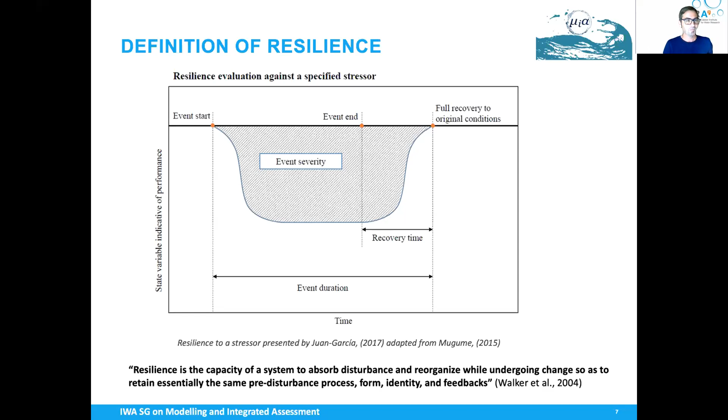So given that context, if we have our urban water systems, we have direct stressors: climate change and human behaviors change the composition and the quantity of wastewater being generated and transported to the water resource recovery facilities. So these changes are direct stressors. So the system needs to adapt, needs to be resilient against these changes to guarantee the performance and to go back to normality if the system goes in a different state.

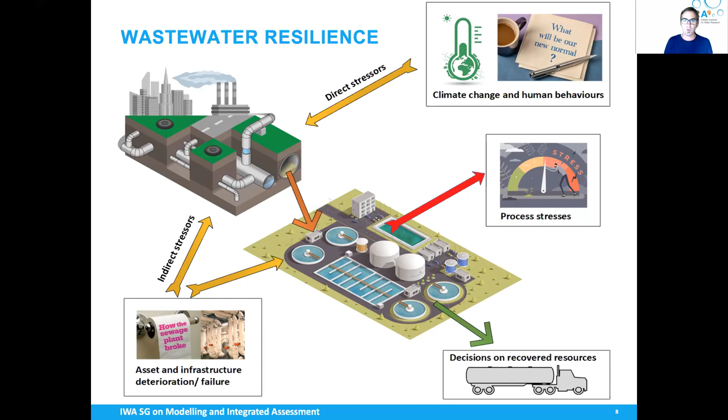Furthermore, we have indirect stressors. So if there's a certain infrastructure deterioration or we have failure, the performance of the system might be affected. So the system needs to have strategies, needs to build up resilience against all these stresses. And for instance, control might be a manner of building resilience, or redundancy in equipment, redundancy in sensors. And all that context makes it difficult to make decisions, especially on the recovery of resources. And hence, proper frameworks are needed to make all these decisions and handle those complex elements.

Next slide, Ulf. So in this webinar, we'll cover 4 themes. Mainly we'll talk about the use of modeling practices to evaluate dynamic resilience, how to visually communicate. It's not easy. There are so many metrics. So how to easily communicate and inform the operational staff, how to move forward in this field, and how to address the challenge of modeling decisions on optimal process streams for resource recovery.

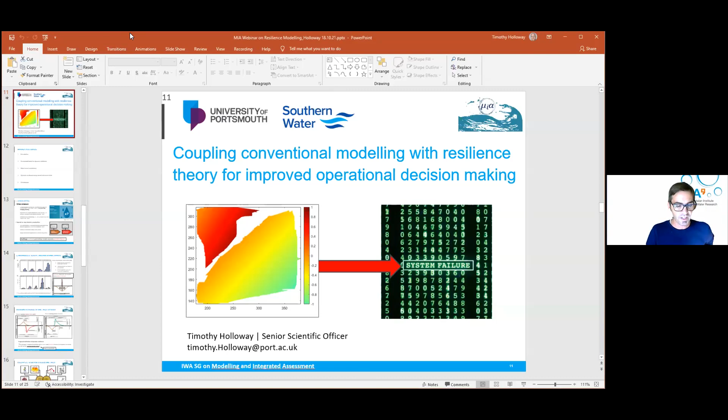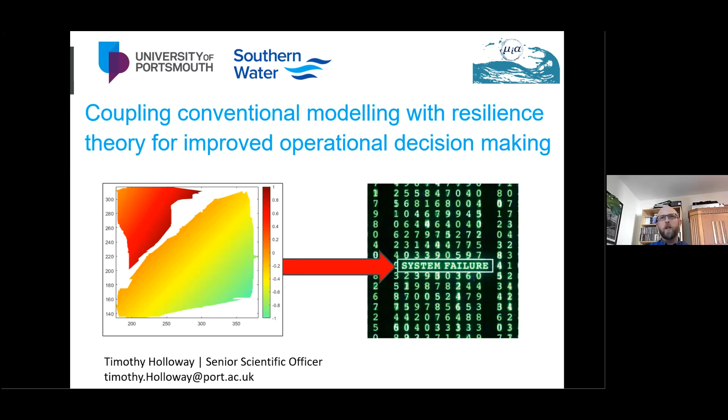Okay, thank you very much, Lewis, for that really great introduction. Today I'm going to be talking about coupling conventional modelling with resilience theory for improved operational decision making. As Lewis alluded to earlier, it's quite challenging sometimes to explain these very complex parameters to operational workforces. So in terms of the agenda for today, I'm going to start off with an introduction, then move on to the conceptual basis for dynamic resilience, then show you some state-based simulations we've done around Monte Carlo, and then move on to data-driven modelling around resilience using actual instrument data from 10 years of a wastewater treatment plant, and then give you some conclusions based on that.

So from the introduction, I probably don't need to tell a lot of you this. Obviously, our population is increasing, albeit at a lesser rate. One thing I find very interesting is that by the end of the century, we will be 1.4 times the planet carrying capacity, which is quite worrying. And as a small island, the UK, it could be quite challenging there. Also, depending on our path, we're likely to exceed 2 degrees above pre-industrial levels. Rainfall intensity is also changing. We're certainly seeing that in the data, that the intensity of rainfall is increasing. So that, for instance, has issues with CSOs and storm tank overflows.

So in terms of the impact on wastewater production, given COVID-19, we've seen a lot of transient populations. So we've seen that changing quite a bit. For example, in the West Country, where people have moved out of the cities, a lot of the plants are now becoming overwhelmed with wastewaters. We're also seeing quite significant dilution. When we see these high intensity events, we're seeing quite significant dilution, but in between, we're seeing extended dry periods. So we're seeing highly concentrated wastewater.

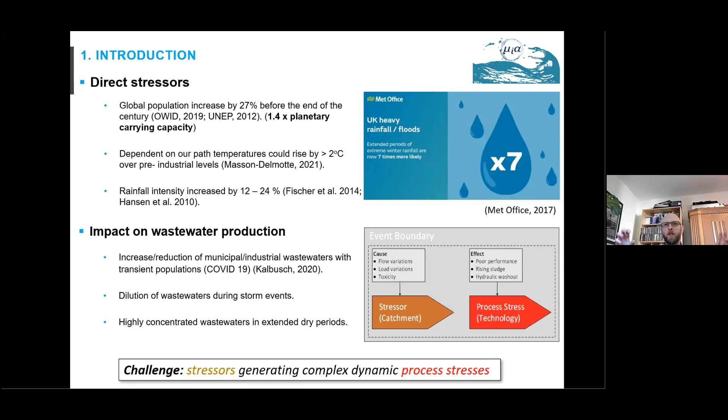So I suppose the challenge around that really is that these stressors are generating complex dynamic process stresses. So what we're proposing to do is to separate those two, so we look at them independently. So try to characterize the stressor, but also the process stresses that are happening within that particular technology. So where did we start?

Well, we started looking at stress in particular, and we did a survey of wastewater professionals. So 260 participants, and hopefully there's some people on there, so I'll thank them now if they've already filled it in approximately a year ago. But it was fairly unanimous that from that, they thought that process stress was a variance from a benchmark condition or a standard operating condition.

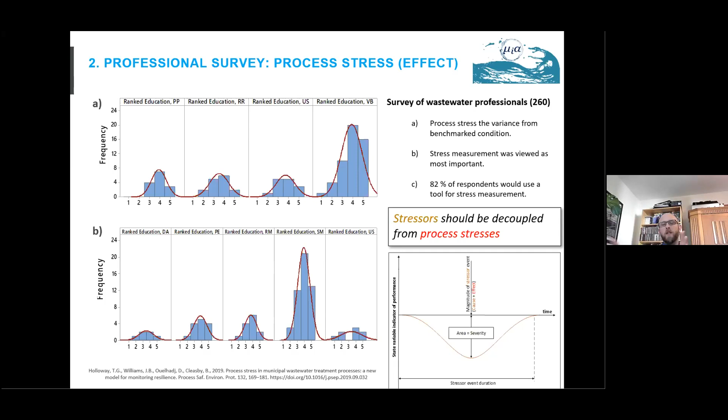And stress measurement was viewed as most important, with 82% of the respondents saying they would use a tool for process stress measurement. So this really emphasizes that we need to separate these two things out to understand the stressors, so what's happening to the works, and also the process stresses associated with that. So it elaborates on previous resilience kind of theories.

So our proposed extension, as I said before, is to separate these two things out so that we can look at them independently. And when you start to do that, and when you start to look at the time involved, you can start looking at reaction times to events, and you can start categorizing and building knowledge of those historical events in more of a visual way so that you can communicate it to operators.

Obviously, the flip side to that is that you can end up with periods in a diurnal profile where your process is actually relaxed, i.e. resilient. I say resilient, but that's mainly around physical processes where you can be resilient, whereas biological processes are always reacting to change. So they could go into a stressed position.

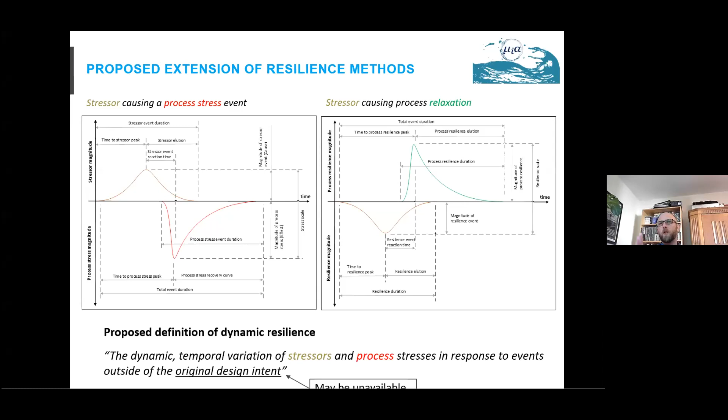So our proposed definition of dynamic resilience is that dynamic resilience is the temporal variation of stressors and process stresses in response to events outside of the original design intent. And I'm aware that a lot of the time when you've got historical assets like we do in the UK, that may not be available. So we've tried to come up with something that gets around that as well.

So in terms of the conceptual basis, where I'll be focusing is the direct stressors, which generally come from the catchment. So they result from consumer behavioural changes, climate change, again, behavioural change in terms of, as we've seen with COVID-19, industrialisation and population growth.

I'm not really going to focus on the indirect stressors in this presentation, but they're related to the asset: mechanical failures, poor maintenance, poor design, and operational funding. But both of these ultimately result in process stresses. So stressors are the cause and process stresses are the effect of those.

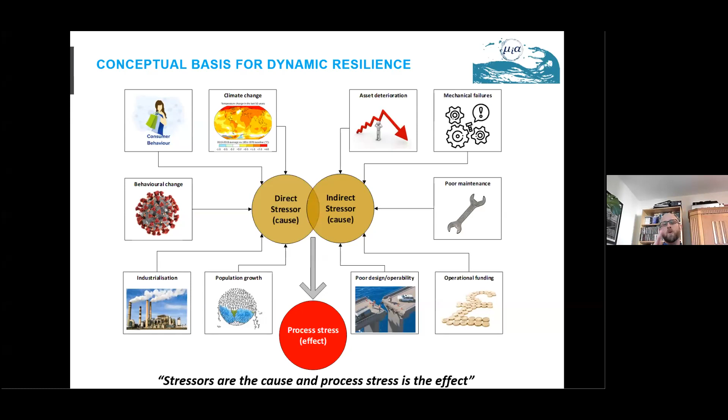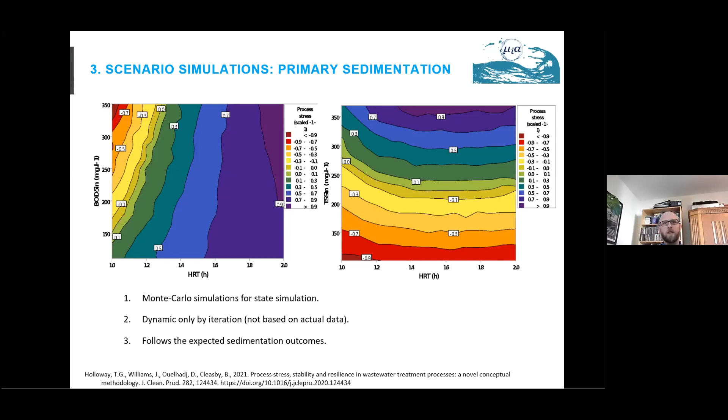So we started off looking at Monte Carlo simulations, and we very quickly got to a point where we realized how many simulations we had to do to replicate reality. Although these do represent what you would expect of a primary sedimentation tank, we then went down the route of looking at real data because it's important to know what's happening at that time. It allows you to react almost instantaneously.

So we came up with this three-part process using mechanistic models. So we started off with the modeling, the ASM models based around heterotrophic bacteria. And we had two models. So the first model picks up on the standard operating condition or benchmark condition. And the master kind of oscillates around that slave. So that's how you compute your dynamic resilience.

So that moves on to the second stage, which is that computation of dynamic resilience. So working out your variances and where you are from your standard operating conditions. And then from that, we go through a number of transformations to produce self-ordering windows. So almost like a fingerprint of what's happening in that process as a result of the changes that we're seeing in it.

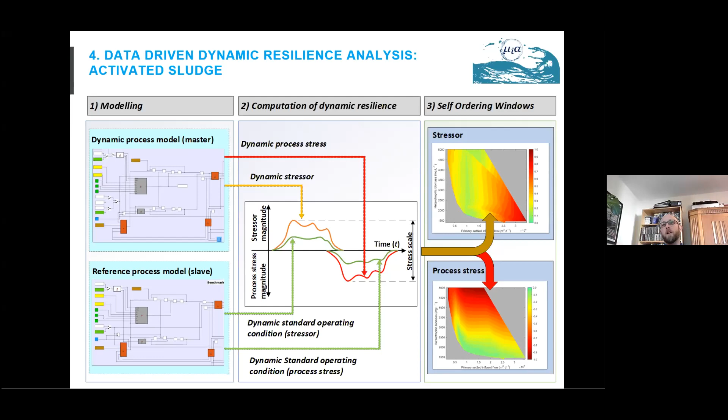It wouldn't be right talking about data-driven models without talking about the challenge of using real data. And on the left-hand side there, you can see data over a 10-year period, looking at a diurnal profile. And as you can see, the range is fairly large, but also the data is fairly skewed. And also it's not really very normal or log normal.

So it can be quite a challenge if you don't go through the right preparation to put it through off-the-shelf algorithms. I think as well, a lot of the time, the temptation is just to simply take averages, and I warn against that because of the way that the data is skewed, because you can end up with a skewed central tendency. But what can we learn from this? So if your data looks a bit like a smudge on the right-hand side, what do you do with that?

So we came up with just a simple methodology to separate out three flow regimes. We used simple clustering methods after data cleaning and validation just to separate three flows. And then the flow with the highest density of data points we used as the standard operating condition, as you can see there. And then you can see the oscillation. So the red line is the actual data that we're putting through it. So yeah, we are fairly accurately able to separate that out.

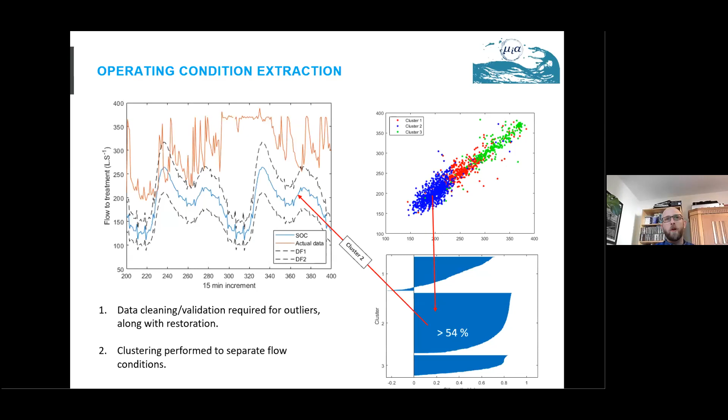So then we moved on, we started looking at time-based stresses and process stresses and how they react. And that led us to elaborate on some existing parameters that are available. So we looked at process failure rates, but we also looked at that in the upper and lower tails. And we also looked at the prominence of events, and actually the duration of the prominence is quite important when you're looking at instrumentation, because they either fail high or they fail low typically. So you can then discount certain ranges of data there.

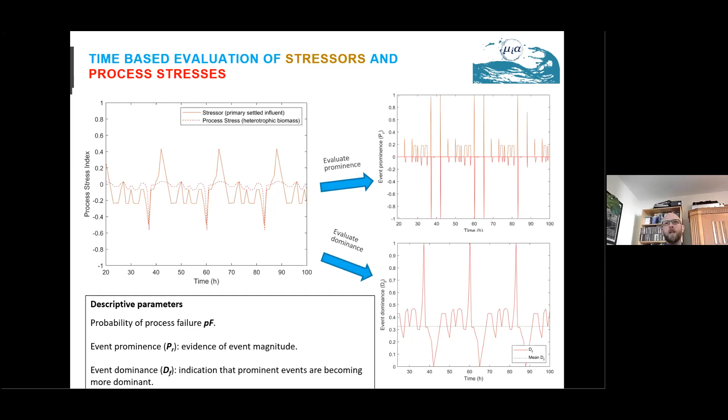We also looked at the dominance, so the difference between the stressor and the process stress. And that gives you an idea of how dominant that particular event is on your process. So then we moved on to self-ordering windows, as I said before. These are kind of a picture of what's happening in your actual wastewater treatment process. So on the left, you've got a stressor, and as you would expect, as the flow increases, it has a more concentrated stress. Whereas the biological process reacts slightly differently, because you've got a number of different rates which are interacting with this as the dilutions change within that process.

An interesting thing to note on here is that although you have an ideal operating condition running through the plot, that will also, as the flows increase, affect your downstream processes. So you can pick that up by using a variety of these different plots that we see here. And this is only reliant on the data that you can get. Obviously, we need a certain, I call it data richness, it needs a range and depth to it to actually produce these plots. And the grey areas on the plots are areas where there wasn't sufficient data. But it's almost giving you like a fingerprint of how your process is reacting.

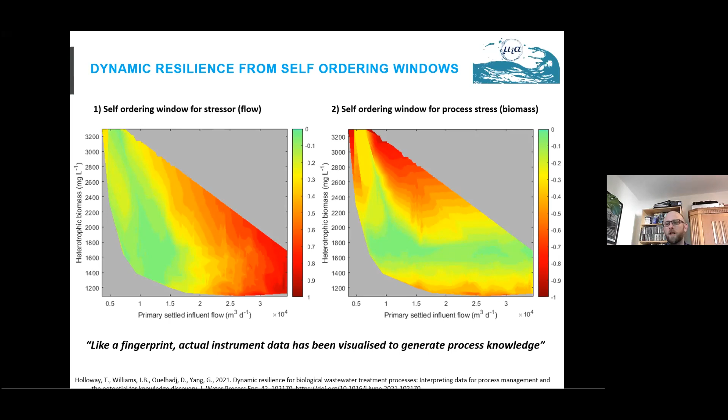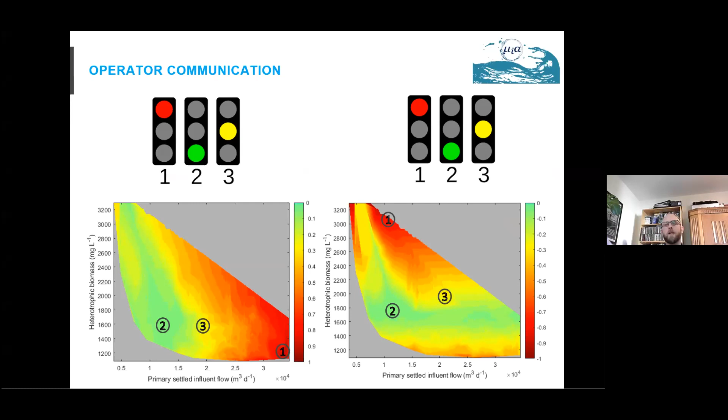So from that, in terms of operator communication, we can then take this to sort of a traffic light level, which gives operators early warning of events and can also allow you to apply interventions and also optimize against process stresses and the stresses that you're seeing. And once you've got a database of these, you can then react a lot quicker, as I said before.

So this is kind of where we are now, and this is some of the current work we're doing, which is at fairly early stages at the moment. But we're looking at using the same methodology for a whole works. So going from primary sedimentation, activated sludge, and humus settlement. And these work in different scales. As I said before, we have primary sedimentation, which typically in this instance will work from -1 to 1. And then process stress and activated sludge, because it's biological, it's always under stress, so it's always reacting to change, albeit temperature, flow, load, those sorts of things.

But what this really shows you is that the primary sedimentation and the humus settlement aren't really stressed, but actually when you look at the humus settlement in terms of the surface loading rates, you're starting to see stresses emerge. And the activated sludge in the higher flows and the higher loads, as you would expect, is starting to show some stresses.

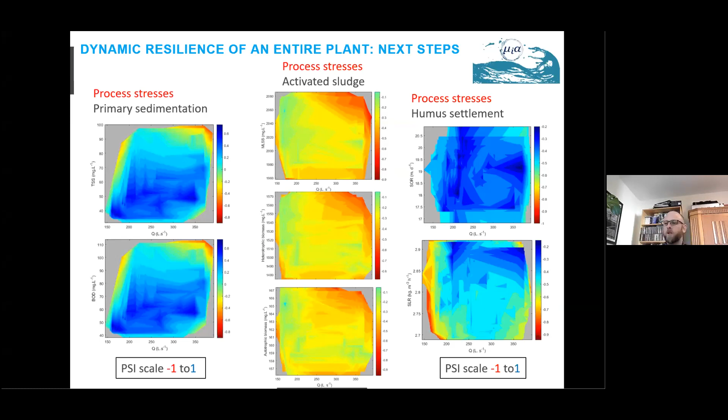So in terms of the conclusions, dynamic resilience of wastewater assets requires the separation of stresses from process stresses, so having those two parameters. It has also been possible to use actual instrument data to simulate and visualize the stresses and process stresses. And these dynamic stresses have been identified from real data and used to simulate the process stresses.

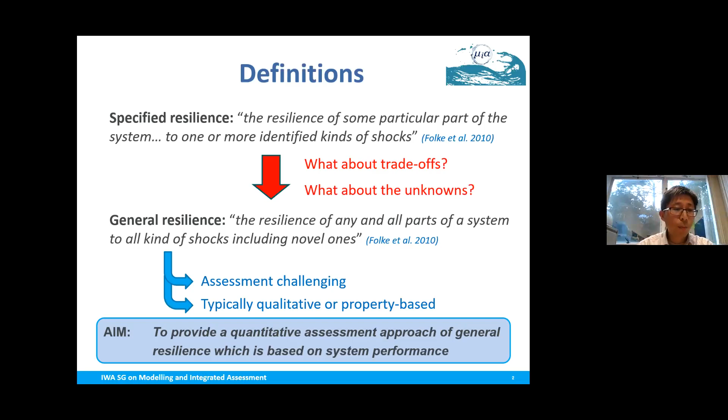The underlying assumption is that our engineers know the water systems better and can characterize all failures. So in this case, we don't need to know what threat caused the failure. All we need to know is to understand the impact and the consequences of failure. Using the middle-based approach, we can decompose general resilience into multiple formulations of specified resilience.

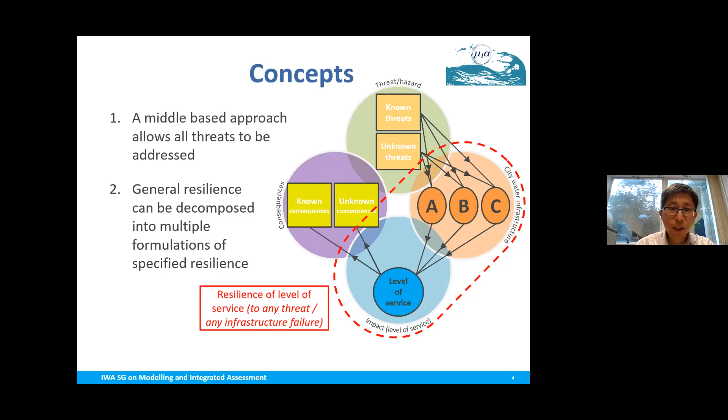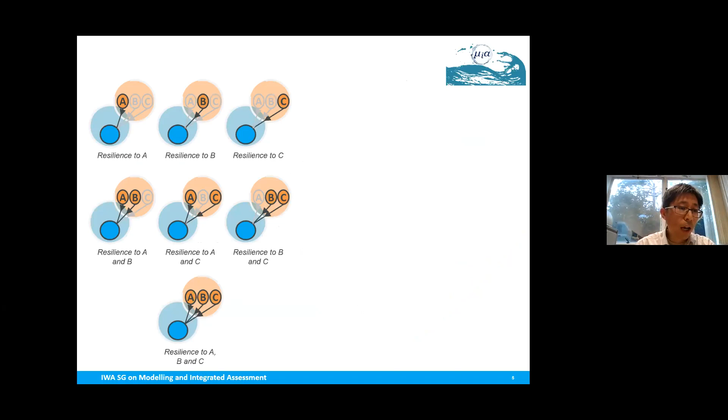So here's the example. As you can see, we have 3 failures, A, B, C. Considering individual failures, we have 3 scenarios. If we consider two failures at the same time, we also have three scenarios, AB, AC, and BC. And the final scenario is all failures occur at the same time. So in total, we have 7 scenarios. For each scenario, we can apply a stress and strain test to assess specified resilience.

On the x-axis, we can increase the stress level from no failure to complete failure, represented using the range from 0 to 1. The y-axis represents the level of strain. Here it is the level of service failure, normally represented using failure duration or failure magnitude. For each scenario, we can get one curve representing the system response when it's stressed. The area under each curve measures the specified resilience under that scenario. So the system is more resilient when the area is smaller.

So with the interventions, we aim to reduce the area, that is to move the curves down. So the maximum area covered by all curves, the gray areas here, can represent the general resilience of the system to all failures.

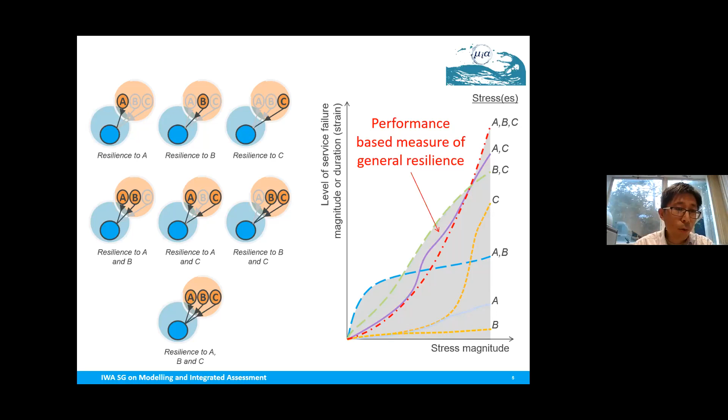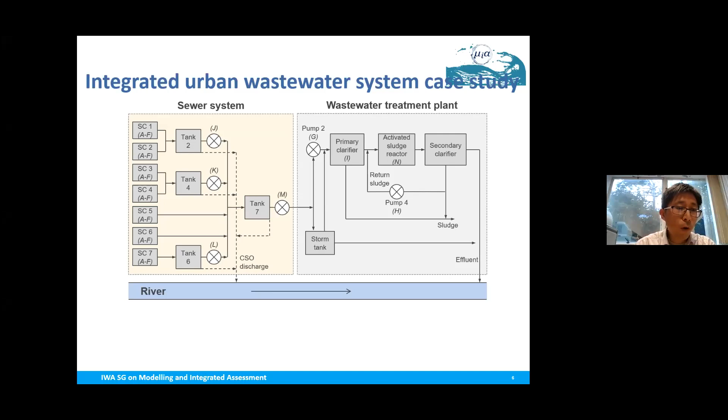I will use one case study to demonstrate how the approach works. So this is an integrated urban wastewater system. It includes the sewer system, wastewater treatment plant, and the receiving river. The sewer system has 7 subcatchments, 4 storage tanks, and related pumps. Step 1 is to identify all potential failures. Here, we consider the increase in sewer inflows and pollution levels, and pump failures and aeration failures. In total, there are 14 failures considered.

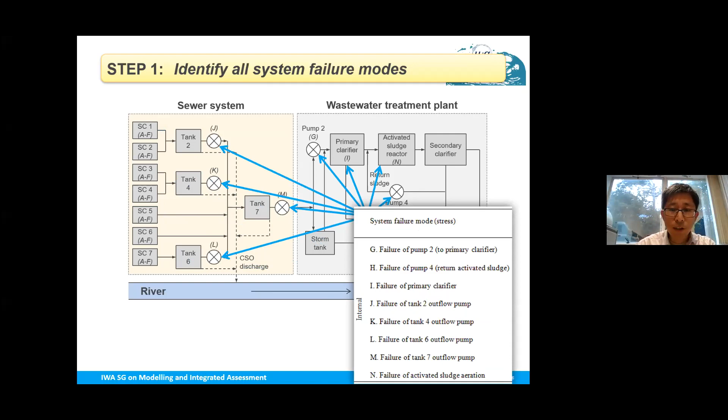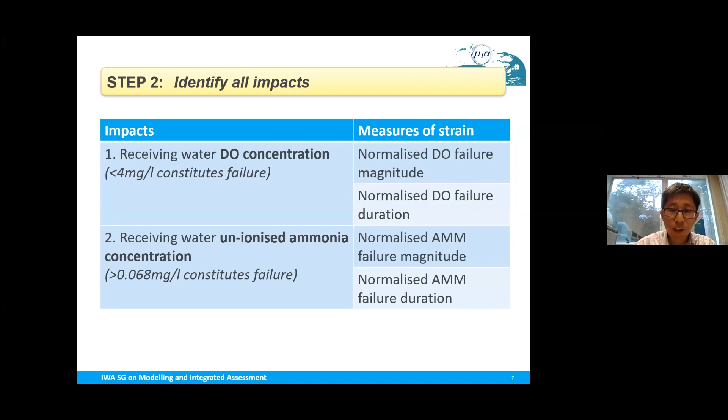Step 2 is to identify all impacts. In our case study, the impact is measured using DO concentration and un-ionized ammonia concentration. We set an acceptable level according to some regulations. The DO should be greater than 4 milligrams per liter, otherwise the system fails. Ammonium should be lower than 0.068 milligrams per liter. For each indicator, we can calculate failure duration and magnitude. So we have 4 measures of strain.

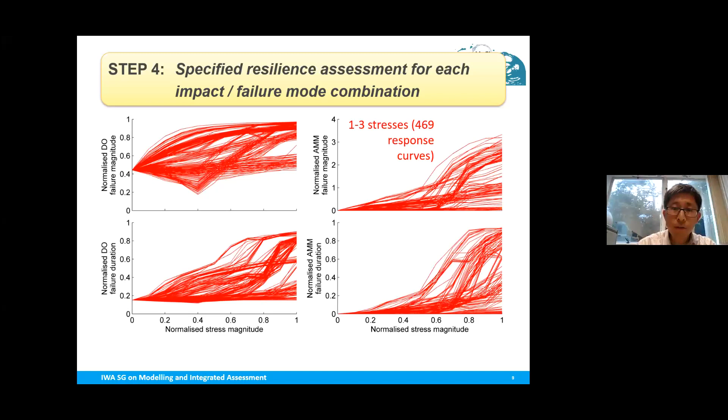Similarly, we can assess specified resilience for 2 failure scenarios, and then 3 failure scenarios, 4, 5, 6, 7, 8, 9, 10, 11, 12, 13, 14. So in total, there are 16,000 curves. Now we can see the overall picture of general resilience of this system.

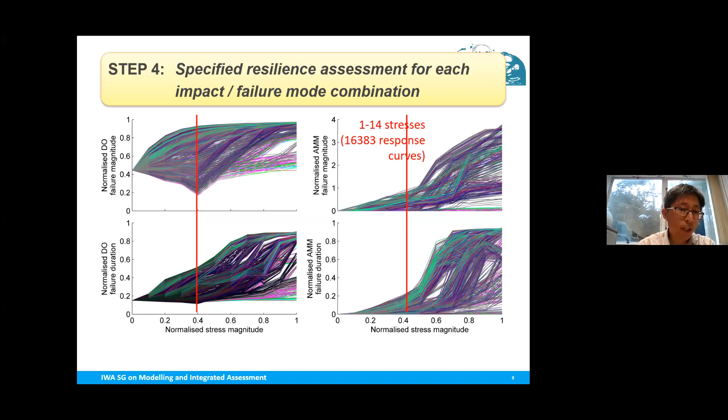So there is a lot of information we can get from this graph. I just want to highlight one point. The system is more resilient in terms of ammonium. As you can see here, at the 40% stress level, the ammonium failure duration and the magnitude levels are much lower than DO failure levels.

Now, I want to show how the result can be used for intervention development. The first step is to identify service measures which should be prioritized for improvement. If we compare the area for DO duration and ammonia duration, the two graphs at the bottom, DO level is less resilient than ammonium as it has a bigger area.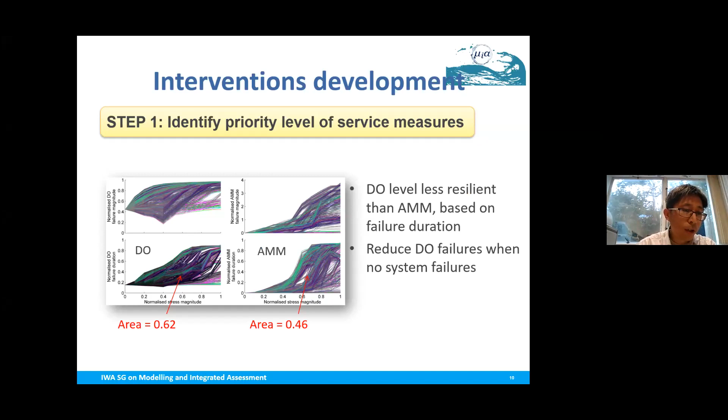From the top left figures, we can also see there are significant DO failures when there's no system stress. So that is when stress level is at 0. So improving DO failures should be prioritized.

Here we can identify critical failure modes which contribute most to the service failures. The x-axis shows all the 14 failure modes. The y-axis shows the percentage of the failure appeared in the top 500 worst failure combinations. For DO magnitude, as you can see here, the failures A, I, and N are critical failures.

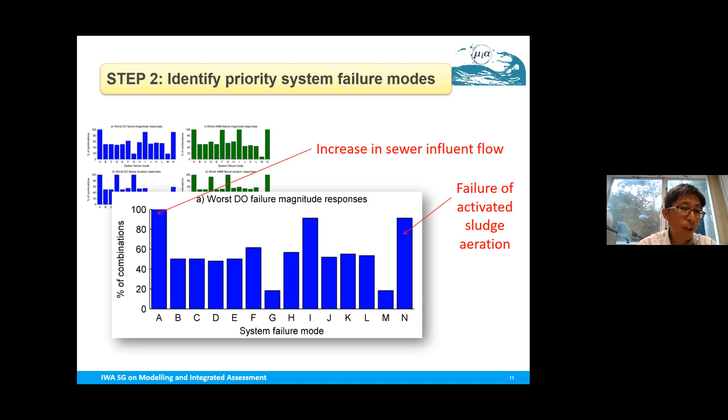Failure A is the increase in sewer inflow. It appears in all 500 worst failure combinations. Aeration is also a key factor responsible for DO failures. So intervention should aim to reduce these priority failures.

Now we can develop interventions to address priority service measures and failures identified in the first 2 steps. We consider 5 interventions: increase flow attenuation in catchment, increase maximum outflows from a storage tank by a factor of 2, double the capacity of the tank, increase aeration tank volume by 10%, and increase the capacity of storage tank by 50%.

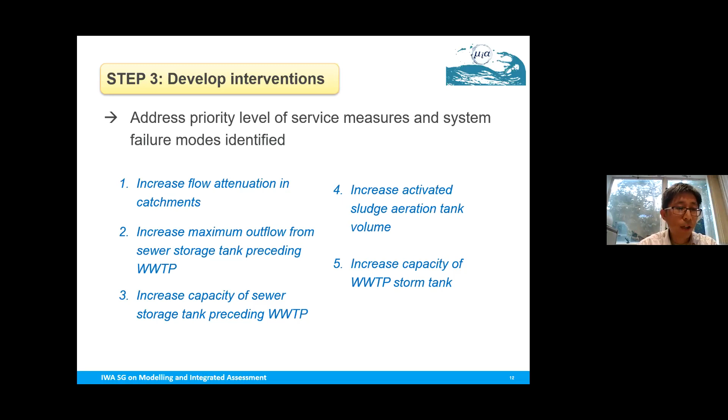Now we can evaluate these interventions in terms of resilience. From this figure, we can see interventions 1, 4, 5 have little impact on resilience. The red curves in the radar plot represent the resilience without interventions, and the colored areas represent the resilience with interventions implemented. The curves and the colored areas are almost the same.

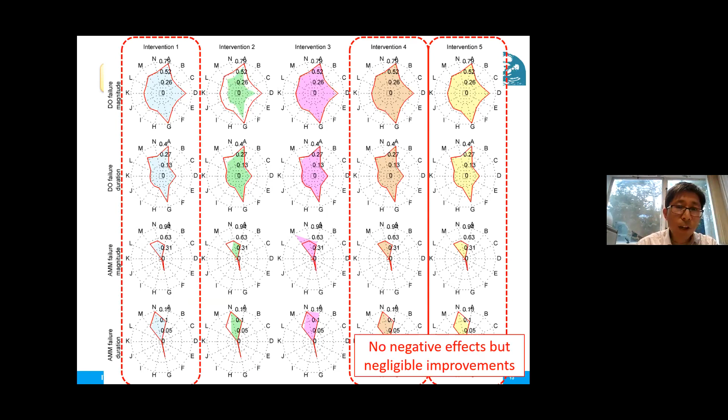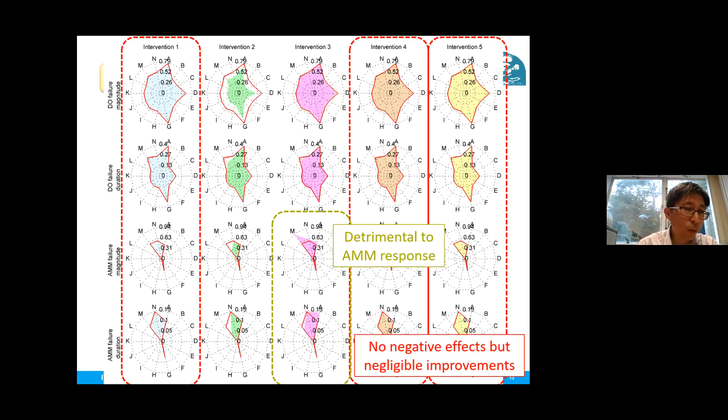However, intervention 3 has a negative impact on ammonium. It actually increases ammonium failure duration and failure magnitude. So this intervention should not be considered. Intervention 2 can significantly improve specified resilience in terms of all 4 measures considered. In particular, for DO failure magnitude, the top figures in the second column. So intervention 2 should be the best option.

So to summarize, we develop a middle state approach for general resilience assessment. It can consider the potential effects of unknowns on system performance without the need to determine all threats to the system. General resilience is decomposed into multiple components for assessment. This made possible performance-based assessment, although the number of combinations could be very large, as you can see in our case studies. General resilience assessment can be used to identify priority service measures and priority failure modes.

So this will help us to develop appropriate interventions. It may be easy to improve specified resilience, but our case study found it very challenging to improve general resilience.

Thank you, Guantao. Yeah. I would like to just say one thing. I would like to thank the entire Safe and Sure team for the work. Safe and Sure was led by my colleague, Professor David Butler at the University of Exeter. It was funded by EPSRC and was completed a couple of years ago.

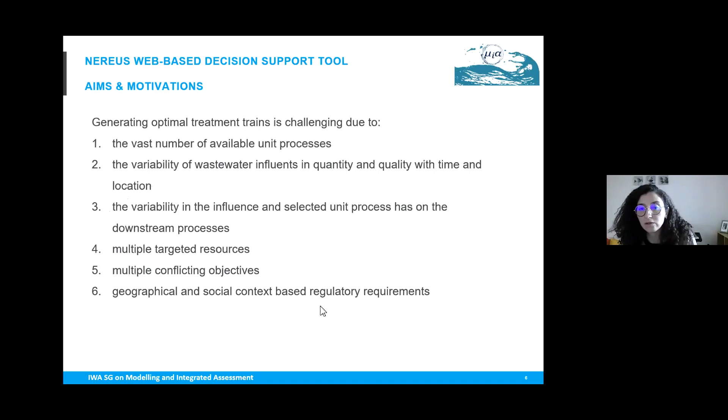We would also like to simultaneously recover multiple resources, and these are based on conflicting objectives, since we would like to recover based on sustainability targets. The geographical and social context makes it even harder as regulatory requirements are changing. For these aims, the NEREUS decision support tool aims to enable decision makers to make informed choices based on these sustainability dimensions. And we would like to make the tool web-based so that it will be available for everyone's use after the project ends as well.

In the conceptual framework of the tool, we have 4 main building blocks, based on the user input. The information collected from the user input is combined with the information we have in the knowledge library, and then we use them in our model, not to make a final decision, but to generate a treatment train based on all the multi-criteria we have: economic, environmental, social, and technical. At the same time, it takes into consideration the different target resources the user has, and the different raw influent characteristics.

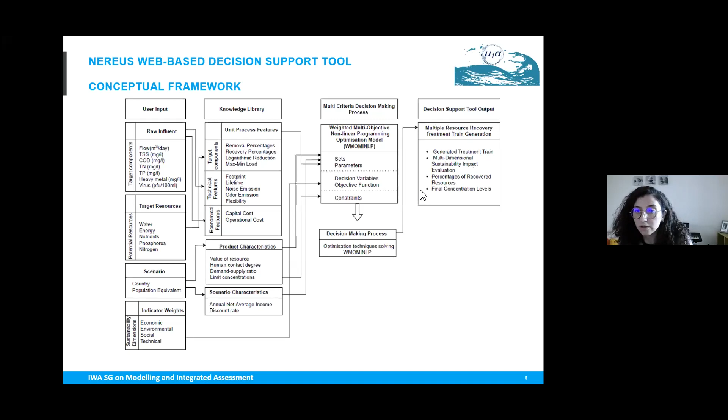Not only the raw influent characteristics and the targeted resources are asked; we would also like to consider the country they are in and the pilot site size as population equivalent. All this information informs the decision-making model. Through this, we generate a treatment train that has all the information from the user and also meets the demand for the recovered resources. So first, we need to define the key performance indicators we would like to take into consideration, and they were based on the economic, environmental, social, and technical aspects.

And for each aspect, we came up with the sub-criteria, which are the key performance indicators, through our workshop and also our interviews with our pilot partners, as well as in the literature. In order to embed these indicators and make a connection with our modeling, we mathematically formulated those key performance indicators, and we would be able to then quantify these indicators. The more detailed information about how we quantify them and the formulations are in our paper.

So by using the indicators, we could then know what kind of information we need per each unit process, because the indicators are formulated in this way. And since we identified the key performance indicators and accordingly the required information per unit process, as well as the context-based information, we could then convert them as components of our model. So we suggest a weighted multi-objective mixed integer nonlinear programming model.

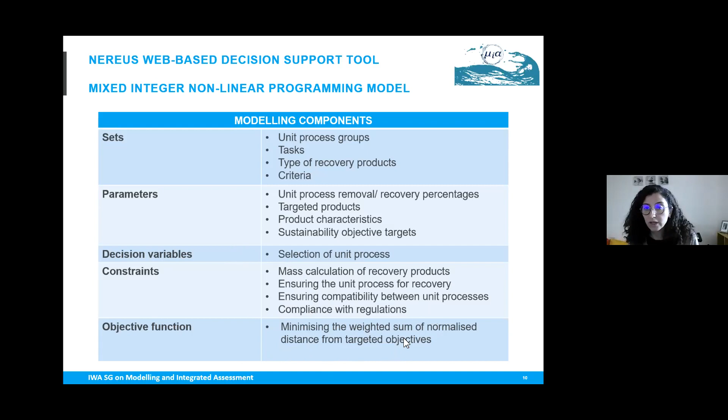And for our objective function, as we are aiming to optimize our sustainability objectives, we would like to minimize the weighted sum of the normalized distance from these targeted objectives. For more information on the formulations and the detailed model, you can find it in our joint paper. So we implemented this model in GAMS, the academic version, and we used the BARON solver to solve the model for different scenarios.

And the one that I'm showing here is the large scale one with a flow of 100,000 cubic meters per day, and different influent characteristics that we take into consideration in our model. Here, we gave equal weighting, and we were aiming to recover energy, nitrogen, phosphorus, and drinking water. As a result, after we run the model for these conditions, we get the selection of the technologies that take place in the treatment train.

And as you can see, there are group numbers here, which were the main assumption in our model: after we had the list of technologies, we needed to group them based on the maximum COD and minimum COD concentration that they can take. And it helps us, after we select the technologies, to sequence them.

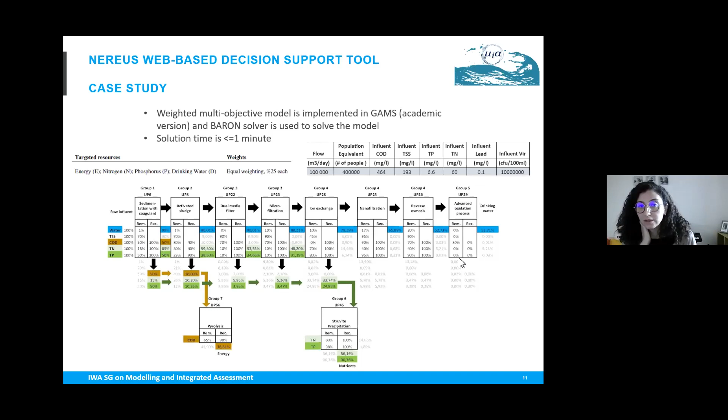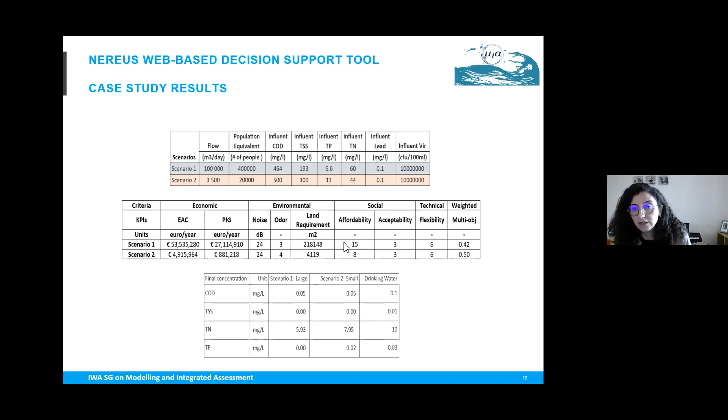So although we have the nonlinear model and we could implement it in the GAMS solver, this is not really ideal for our final objective in the decision support tool, because we would like to make the tool available to everyone, and we would like to make it online. And we didn't want to have the barrier of having issues in terms of the software. We also would like to have a more robust design rather than grouping the unit processes after each step.

We don't want to make these assumptions, and we would like to see, after each unit process is selected in the train, what is happening for the mass balances of each concentration level for the different types of compounds. And we also would like to see the detailed information in terms of costing when the flow is changing from the start towards the end. So that's why we would like to suggest our customized algorithm.

And in this algorithm, we are starting with a huge set of solutions. And from this huge set of solutions, we are finding the candidate unit processes that suit the influent quality that we have in the beginning. And based on these concentration levels, after they are suitable with each other, we are selecting the unit process based on the weighted sum of all the criteria that we have based on the unit process characteristics.

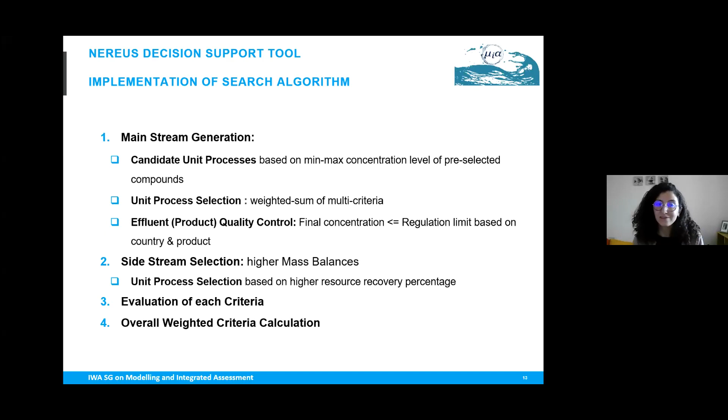Seda, sorry, you need to conclude.

Okay, and in the user interface, we are collecting this information easily, and then we are showing the users their resource recovery and discharge options based on what they entered. And as a conclusion, this web-based DST can generate wastewater resource recovery trains, and we can provide the users the different economic, environmental, social, and technical impacts of them.

And as future improvements, we would like to integrate the life cycle analysis part, and we would like to fine-tune our search algorithm and do some further validation of our findings with our partners.